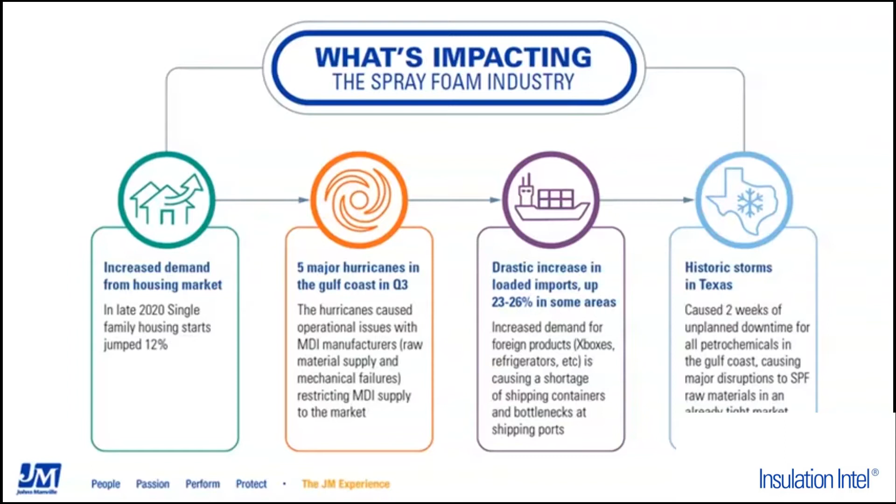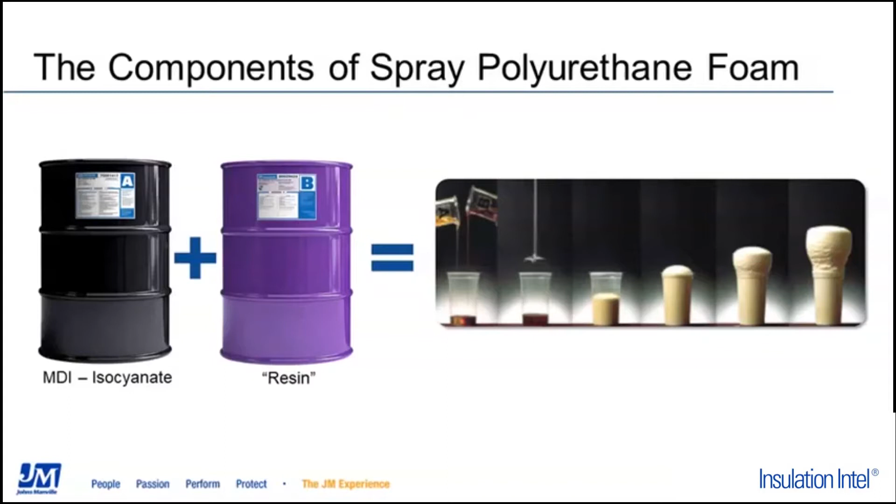So just talk a little bit about the components of spray polyurethane foam. As many of the people on the phone know, on the left-hand side here, we have a drum of isocyanate, sometimes referred to as A side, MDI, PMDI. This is 50% of the composition, and it is not polyurethane, it is just the isocyanate. And when we combine that A side with the B side, shown here in the purple drum, sometimes referred to as resin or polyol, the two products come together through a proportioner that you guys will utilize, and that proportioner obviously preheats those chemicals to ranges of 120, 130 degrees.

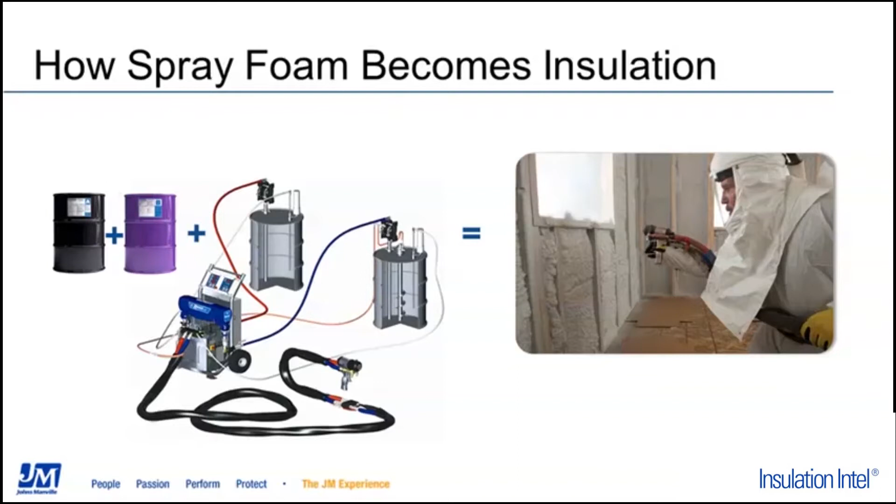Those materials are run down a high pressure hose where ultimately they land at the gun that you see there at the end of the hose, and those two products are mixed at 1,000 PSI. That impingement mix and the culmination of those two different chemical units is when the polyurethane compound is created, and that's when spray foam becomes insulation and is installed into the wall.

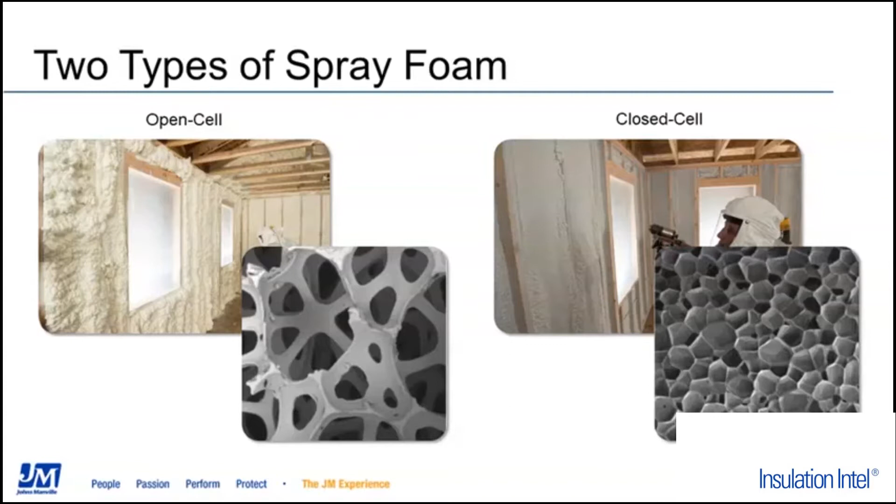When we talk about open cell versus closed cell, over on the open cell, we have what we call generically a nominal half-pound density. That's to say that the open cell spray foams kind of go in a half-pound per cubic foot family. That density might actually range anywhere from 0.4 up to 0.75, but the key is that the cells are open and that they're referred to as half-pound foams, not that they're specifically a half-pound foam. They are referred to as a water-blown foam. Chanel will expand on that a little bit here later.

They do have decent sound dampening. R-values are pretty comparable to fiberglass. There may be a tad less, however, they do have the air barrier properties. And bottom line is they're R13 in 2x4, R19 in 2x6, pretty much the same as fiberglass. They are not vapor retarders, but they do expand radically, fill every kind of nook and cranny void, and do a great job of insulating.

Over on the closed cell foam, which is really kind of why we're here to talk about today, we're going to talk more about the fact that we have Generation 3 and Generation 4 HFC refrigerants, HFO refrigerants. A couple of key points we want to talk about right now is that the closed cell spray foams do have that high R value, something in the neighborhood of 7 per inch. They are air barriers at low thicknesses. They don't require a full cavity fill to achieve an air barrier, nor do they require a full cavity fill to achieve an actual vapor retarder. They do result in increased strength of the structure, something in the neighborhood of 200, 300, even 400%, it just kind of really depends on what it was starting with.

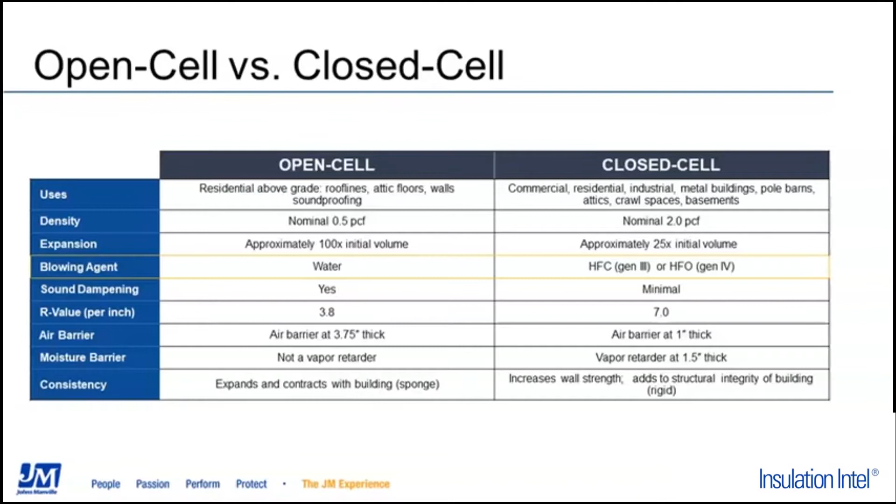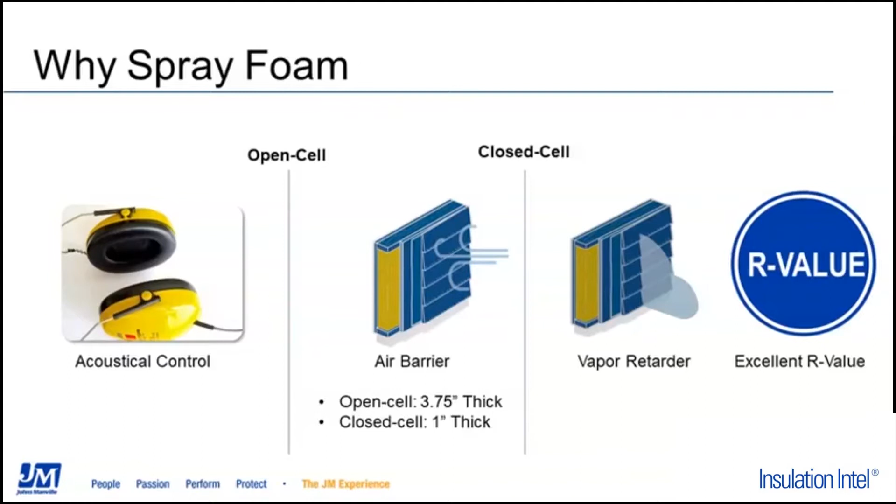As mentioned, the open cell foam has good acoustical control. It is the air barrier. Closed cell foam does not have good acoustical control. If that's ever been purported, we'd just tell you that the closed cell spray foam, it's a closed cell, so it tends to reverberate sound, not absorb it, but it does have that high excellent R value.

And then we'll move over to Chanel to talk about the blowing agents. Thanks, Wyatt. Yeah, so as Wyatt said, I'll talk some more about blowing agents, why they're important, how they affect spray foams, and then also how they have changed over the years.

A blowing agent is a liquid component of spray foam B-side that undergoes a physical or chemical change during application that transforms the polyurethane from an extremely dense solid into a foam. Blowing agents are what gives spray foam its thermally insulating properties. And then there's two types of blowing agents, and these are best classified based on what type of reaction is occurring. Chemical blowing agents react with the A side to form bubbles, which forms the foam. The main chemical blowing agent is water, which forms carbon dioxide bubbles to expand it.

While water is typically used in both open and closed cell, open cell generally uses water alone, and closed cell only uses a small amount of it. Carbon dioxide is much less thermally insulating than a physical blowing agent, which is why open cell has that much lower R value than closed cell. Closed cell, on the other hand, uses that physical blowing agent to provide its thermal insulation.

Physical blowing agents, unlike chemical ones, do not undergo a chemical change at all to form the bubbles in the foam like water does. Instead, they simply boil at temperatures that are lower than typical spray foam processing parameters, meaning that they're changing from a liquid to a gas when the B side is heated as it goes through the proportioner. Since all it takes for a physical blowing agent to change from a liquid to a gas is heat, that can happen without being combined with the A side at all.

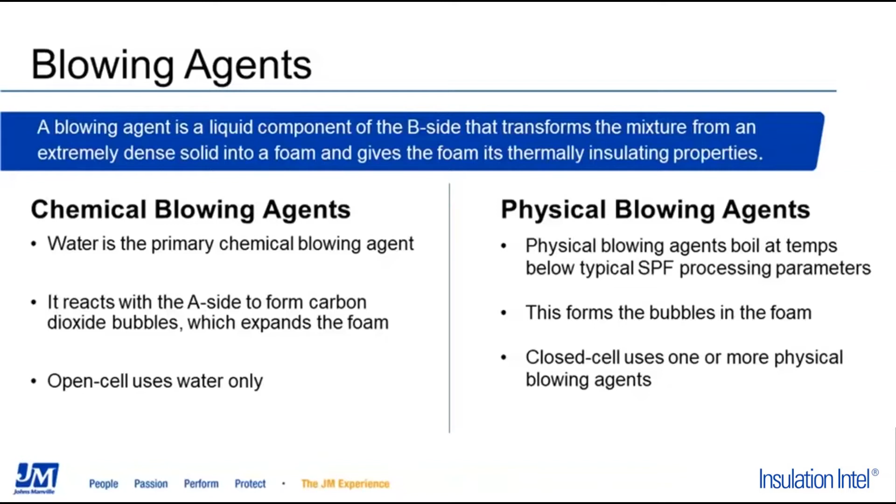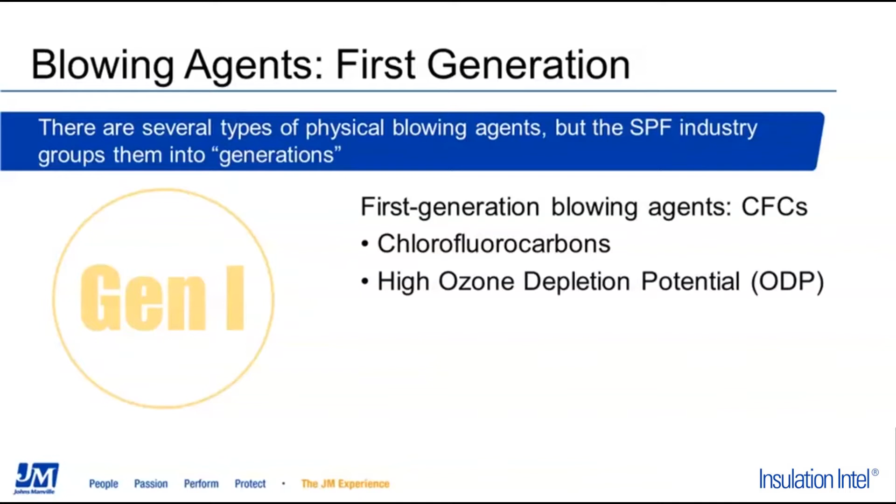Even though there are several types of physical blowing agents, the spray foam industry groups them into generations. The first generation of blowing agents used in spray foam were CFCs, or chlorofluorocarbons. These had a high ozone depletion potential, and they were banned in 1996. The second generation was hydrochlorofluorocarbons, or HCFCs. These also had a medium-high ozone depletion potential, and therefore they were banned in 2005.

The third generation of blowing agents is still in use in most U.S. states today, and was only recently phased out in some states and in Canada. These are HFCs, or hydrofluorocarbons. HFCs have no ozone depletion potential, but they do have a high global warming potential, which we'll talk more about later. Corbond III is JM's high-performing third-generation offering.

So the newest generation of blowing agents are called hydrofluoroolefins, or HFOs. These have 0 ODP and a low GWP, which is similar to that of carbon dioxide. They're a replacement for third-gen in states and countries with the HFC bans in place. And JM Corbond IV was created to match Corbond III's performance, and really without that global warming potential.

So what are global warming potential and ozone depletion potential? Global warming potential is determined by comparing how much energy 1 ton of a gas will absorb to the amount of energy 1 ton of carbon dioxide will absorb over the same time period. So this is a measurement that allows us to compare the impact of different gases in the atmosphere compared to that reference gas of CO2. CO2 has a GWP of 1 regardless of the time period being measured, and then gases that have a larger GWP have a greater potential to warm the earth than carbon dioxide.

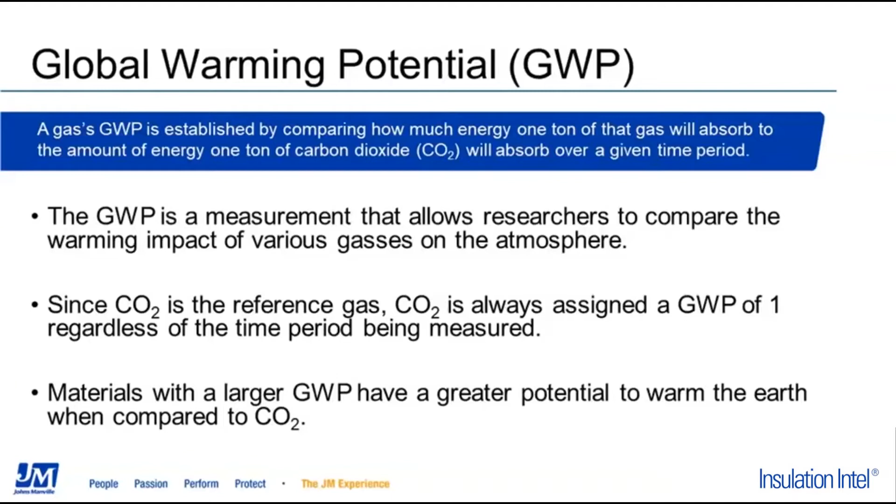There's 3 things that impact a gas's GWP. These are its ability to hold heat energy, the gas's lifetime in the atmosphere, and the volume of it in the atmosphere. So how does spray foam have a GWP at all when the gas is trapped inside the cells?

Well, firstly, not all of the gas in the B side actually makes it into the foam. A little bit of it is lost during spraying when the A and B side mixture is being atomized in the air between the spray gun and the substrate. Also, if spray foam is of poor quality and has a high proportion of open cells, blowing agent can actually diffuse out of these cells.

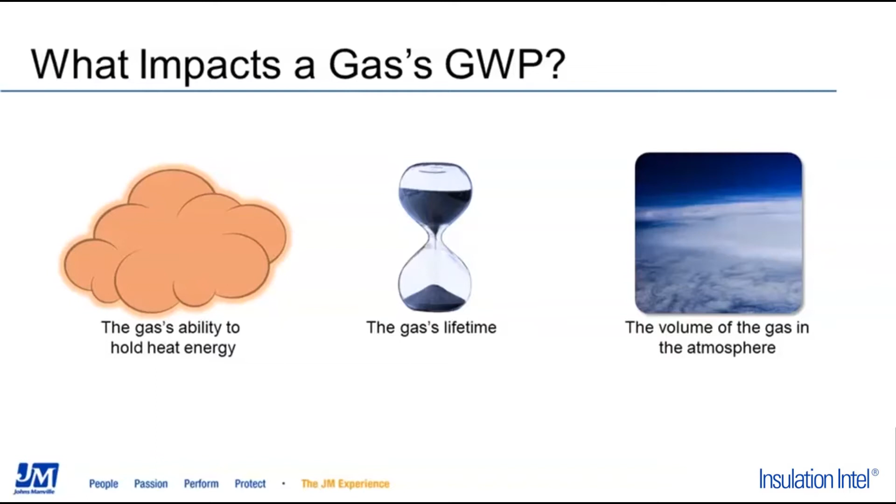This is why it's really important to spray for optimal quality, using a technique such as multiple immediate pass that minimizes that proportion of open cells and keeps most of your blowing agent inside the foam. Loss of blowing agent doesn't just harm the atmosphere, it also harms R value.

So why is GWP so important? As a high-performing insulation and air sealer that maximizes the energy efficiency of a building, spray foam is already a product of choice for architects, builders, contractors, and homeowners wanting to minimize their environmental impact. Reducing global warming potential is another big step in that direction.

Additionally, as states and countries work to combat global warming, blowing agents with high GWP are being phased out, including the HFCs that many spray foams use. And that impacts all third-gen closed cell spray foams. For more information on the states and countries that have either phased out or are developing restrictions phasing out HFCs, this map from the American Chemistry Council is a really great resource since these regulations are constantly changing and restrictions can go into effect very quickly.

Additionally, a ban at the federal level in the U.S. is currently under development. That timeline is not set in stone yet, but we can expect that to go into effect in 2036 or perhaps even earlier.

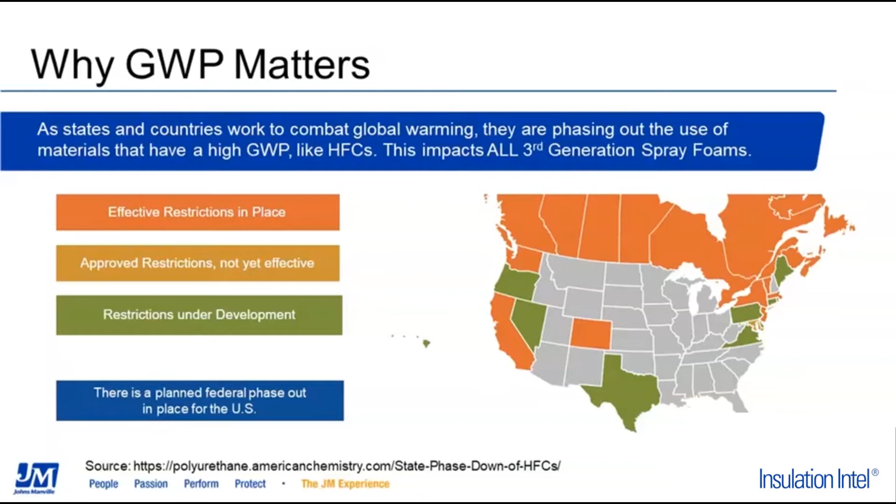So what are the actual differences between HFC and HFO blown spray foams, and what are their global warming potentials? HFCs, such as those used in Corbond III, have a GWP of 800 to 1200, and HFOs, such as those used in JM Corbond IV, have a much lower GWP of around 2.

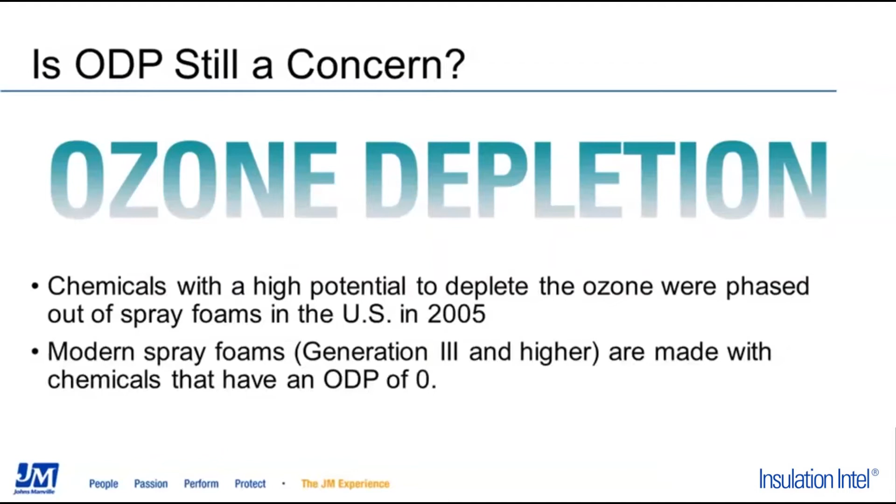Lastly, what about ozone depletion potential? Is that still a concern? So these chemicals that do have a high potential to deplete the ozone layer were completely phased out of spray foams in the US in 2005. And since then, spray foam has been made with zero ozone depletion potential blowing agents. So this is really behind us, and the conversation has really moved on to global warming potential.

So let's take a deeper dive into the performance characteristics of third generation versus fourth generation spray foams. To start off with, let's look at Corbond IV versus Corbond III. JM has developed Corbond IV to be remarkably similar to Corbond III in terms of both sprayability and physical performance. Also, very importantly, yield is equivalent to or better than Corbond III, and that's something that many fourth-gen foams have struggled with, and therefore was really a point of focus for our development.

Other similarities are excellent cold weather application performance, single pass thickness, the ability to apply in multiple immediate passes, and the thermal performance of Corbond IV US. The only two differences are a minor change to processing parameters, which Wyatt will talk more about later, and the thermal performance of Corbond IV Canada, and I'll talk about that next.

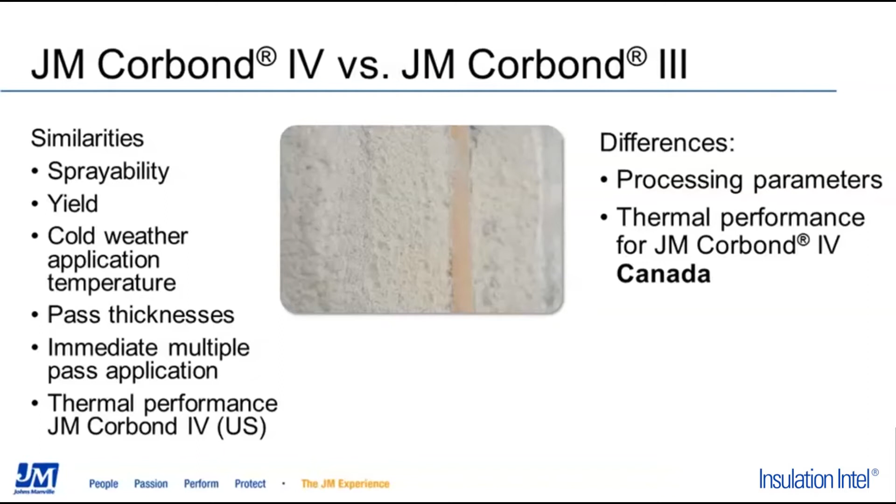So why does Corbond IV Canada, as well as many Canadian spray foams, have different thermal properties than those in the US? The standard for thermal testing in the US and Canada is actually pretty different. The US uses ASTM C518, while Canada uses CAN/ULC S770 LTTR, which stands for long-term thermal resistance. They use the same apparatus, but the sample preparation is significantly different.

C518 testing is performed and reported at a 1 inch and a 3.5 inch thick sample, and it occurs after 180 days of aging at lab conditions. This data is then reported as R per inch. In contrast, LTTR involves cutting a sample into thin slices of around 10 millimeters to age a sample much faster, and is predicting thermal performance after 5 years instead of 6 months. And then that data is reported as RSI at 50 millimeters.

In general, when it's converted to R value, LTTR is lower than C518, somewhere in the neighborhood of 0.5 to 1 per inch, and sometimes even more than that. This is because it's reflecting thermal insulation power after 5 years, and C518 is only looking at the first 6 months of aging. Most of that does occur in those 6 months, but some does continue to happen after, and the rate at which your R value loss occurs does depend on the product, and that final R value where it achieves steady state could occur at the 5 years, but also before or after.

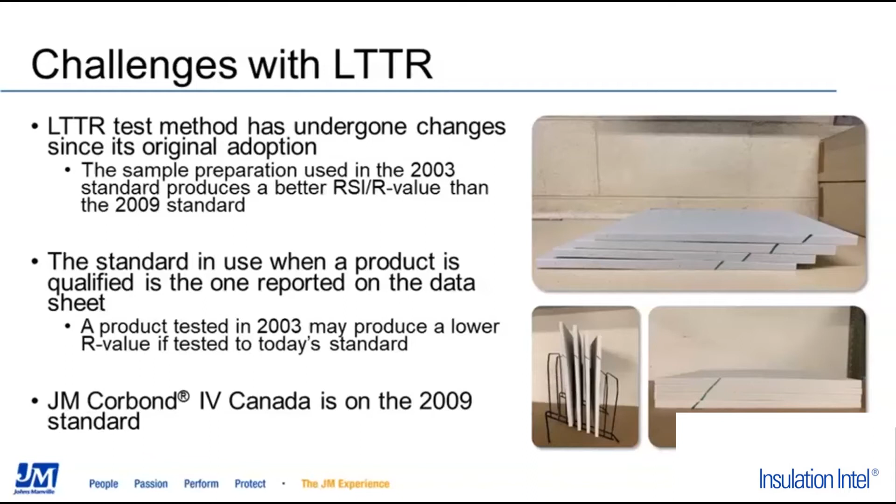There are a couple more details to LTTR that are critical for understanding the test and the thermal performance. This test method itself has undergone changes since its original adoption. The sample preparation used in the 2003 standard, for instance, generally produces a better R value than in the 2009 standard. The RSI reported on a product's data sheet is based on the test method in use when the product was first qualified. So a product tested before the 2009 standard was adopted might have a higher R value than if the exact same foam was tested in accordance with the 2009 standard. For that reason, you might see both the 03 and 09 standards reported on a data sheet. Corbond IV Canada is on the 09 standard.

So what about type 1 versus type 2 in Canada? All these types really mean is that a foam has an RSI of less than 2.0 or above 2.0 at 50 millimeters. So a type 1 foam simply requires more of it to be installed to reach the same total thermal performance as a type 2 foam. For example, say you have a 2x6 wall that requires a total R value of 28. A type 2 foam with an RSI of 2.0 would require 4.9 inches of foam, while a type 1 foam with an RSI of 1.8 would require 5.5 inches of foam.

With these new standards producing lower and lower LTTR values across the board, fewer spray foams are considered type 2 now than they used to be. And all this means is that more foam must be applied to get the same total thermal performance. There's nothing inherently different between type 1 and type 2 foams besides that R per inch. And a type 1 foam might perform equal or better to a type 2 foam when applied at the appropriate thickness for equivalent R value.

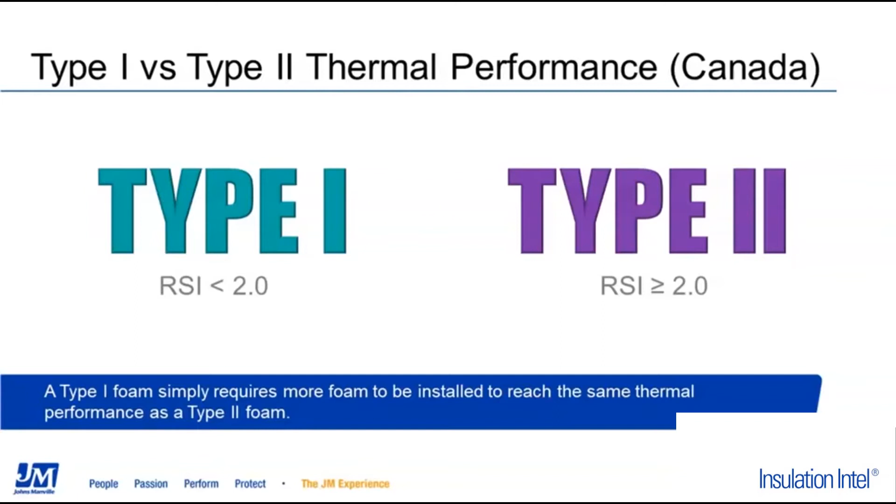So lastly, let's look at a comparison between a competitive Gen 3 versus Gen 4 product just to explain some of the challenges with the HFC to HFO transition that some of you might be familiar with. Though it does have equivalent thermal performance, the Gen 4 product has a higher density and a higher rate of change for dimensional stability. Higher density translates to lower yield, and increased variance in dimensional stability increases the potential for the foam to possibly crack off the framing, damage the substrate, and compromise your air and vapor barrier. Issues like this are why JM has developed Corbond IV to be equivalent in performance and in yield to Corbond III. So now I'll pass it back over to Wyatt to talk about the installation differences between the products.

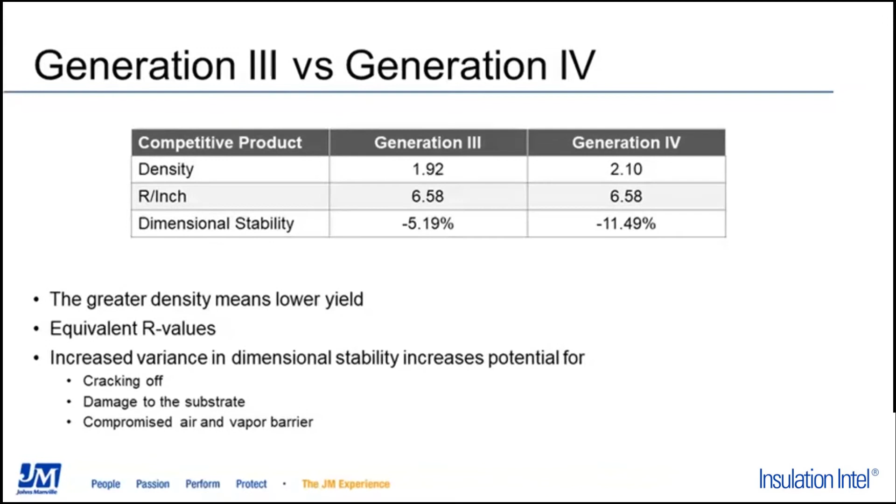Thank you, Chanel. So as mentioned by Chanel there, we did go through a painstaking process. We certainly weren't first to market with a fourth generation spray foam. JM's a very risk averse company, and we were holding out for improved raw materials to create the best possible fourth generation spray foam, and that was done with the fact in mind that that product had to perform as good as or better than Corbond III. I'm not going to tell you that we're actually 100% there, but we're certainly 95% there, and we'll continue to work to create a finished product that in the end outperforms even any third generation spray foam on the market, much similar to what we went through back in 2005 as third generations came in place over second.

So just to talk about the good news on the home front currently is that JM Corbond IV does spray and perform very similarly to Corbond III. The first and largest thing that an applicator will notice is that the Corbond IV is a tad slower on reactivity profile. And that's going to require that we offset that chemical heat aspect of this deal with a little bit of mechanical heat. And so if you're transitioning from Corbond III into Corbond IV, you'll need to move your processing parameters up about 10 degrees.

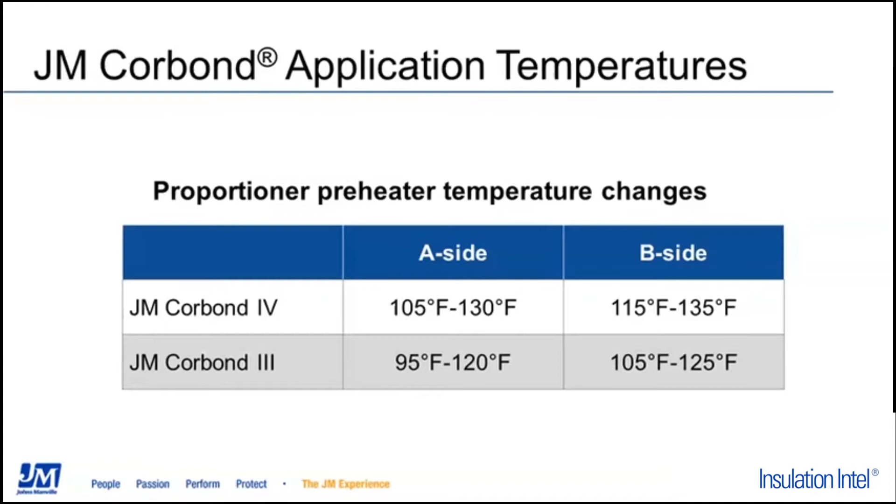Your A side, B side hose, whether you're running a temperature split as illustrated here, or you're running the same temperature across the board, whatever you're currently doing there, just plan on moving up about 10 degrees to help offset that mildly slower reactivity profile. But again, through mechanical change, it could be unnoticeable. And then with Corbond IV, it really does spray very much like Corbond III.

We wanted to take a minute and address the aspect of what is the maximum allowed pass thickness. And there are two key terms that JM lands on. One here would be pass thickness, or what's your maximum pass, and then the other is single sitting. So single pass versus single sitting approach. In a single pass, we're saying that the applicator is going to apply enough liquid that the foam grows to be X thickness. And with Corbond IV, you can apply enough liquid in a single pass to grow to be 4 inches thick, and that's fine.

Following that, you would need to have adequate cooling before you applied anything further. And so you might take that approach if it's a 4-inch finished thickness job. However, if you have a 5-inch, a 6-inch, a 7-inch thick job, if you're doing walls, it makes all the sense in the world on a 7-inch job, as an example, to go around that building twice and do 3.5 inches on each pass. That's going to give you the maximum yield.

This is not unique to Corbond IV. It is the reality of all closed cell spray foams. There is a density gradient associated with pass thickness, and if you want to achieve maximum yield, then you'll need to push towards the maximum allowed thickness. However, there's some concerns as you do that.

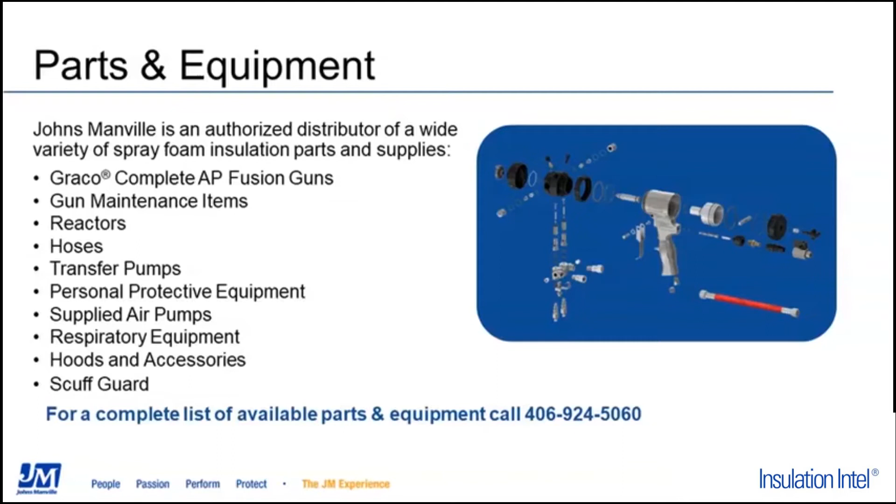All right, thank you so much, Wyatt.